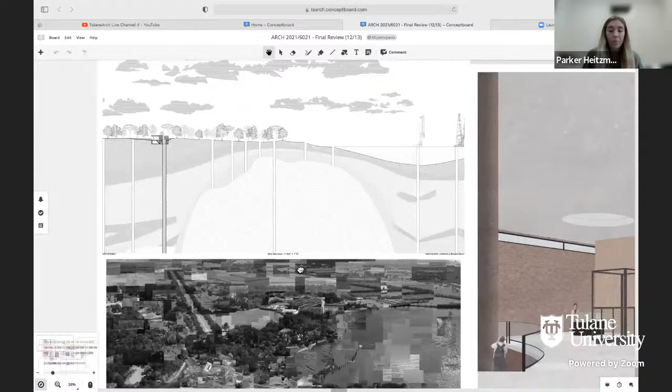Its placement was justified through its close connection to the mine facilities, the shaft itself, and the vertical extraction points along the site, which we can see in the site section below. Ultimately, locating it here highlights the existence of the process of resource extraction, which took place centered around that mine shaft.

The photo collage includes over 400 photos taken by our very own students to highlight the themes and observations made during our visit. The denser areas in the composition are parts of the site that I took specific interest in.

The model at the top illustrates the void of the shaft and how it visually and physically engages with its guests. It also depicts how the structure is partially embedded into the ground, allowing it to form a relationship with the landscape. When entering the building, as we can see in the plans, the visitor can either go to the right or left and is guided by the curved walls at the entry for intuitive wayfinding.

To the right, there is a cafe which overlooks an old train car and the lake beyond, and a small lobby with information about the site. If visitors choose to do so, they can continue outside to the gathering or sitting area and a space to interact with the mine shaft outdoors.

To the left of the entry, the visitors will be invited to the gallery spaces and the reading and archive room. The gallery space is provided with skylights and a clerestory window for illumination of the pieces in the exhibit. Additionally, there are stairs where the guests can descend down into the video exhibition or classroom that's below ground.

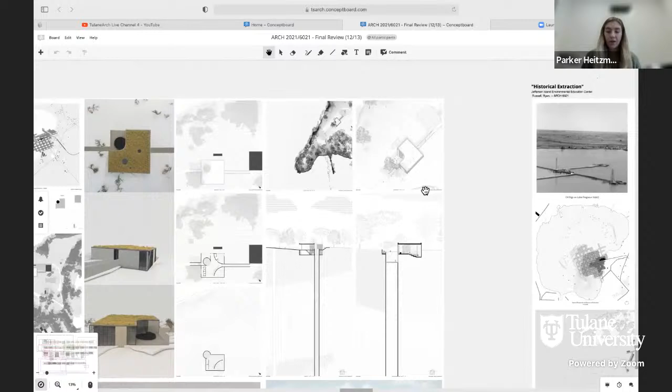The axonometrics show the proximity to the remaining structures in the lake side. And to the right of the axonometrics are the section-in-section perspectives, which emphasize the connection of the mine shaft with the building and the landscape. You can also see the cafe on the far right, which is embedded into the ground and provides an eye-level viewing opportunity for the history remaining on the other side of the glass.

The interior perspective displays the mine shaft and gallery space. The gallery space features the salt wall to serve as a backdrop for the exhibition pieces. The large glass on the right allows the visitors to again look straight down for hundreds of feet down the mine shaft. Lastly, the exterior perspectives show the overarching goal for this proposal, which is ultimately to create not only an education place of the site's industrious past, but to also connect it with the site's landscape, which is now present today. Thank you.

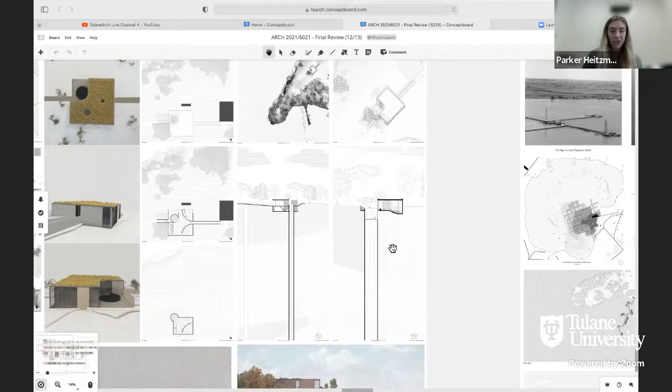First, the selection of brick was to reuse materials that are there all along the water's edge and near where the industrious site was. There's used or pre-used brick, and so I plan to reuse that as a sustainable measure. And for the mine shaft, I intended not to put lights in it because I wanted the look, where you can see down as far as possible until it's just black, to emphasize how deep into the ground it is. That was my approach for that.

And then the last question was about topography, right? The topology, and why you didn't react more to the existing site, why you just planted your very man-made rectangle square into the site and didn't deal more with the lines that the natural topography would provide. My concept revolved around the mine shaft, so I couldn't pick that up and move it somewhere else. My site is there specifically for the shaft, and I embedded it enough that you could see out into the view on one end, with the other end being almost completely in the ground, if that makes sense. So, section. Thank you very much. Okay.

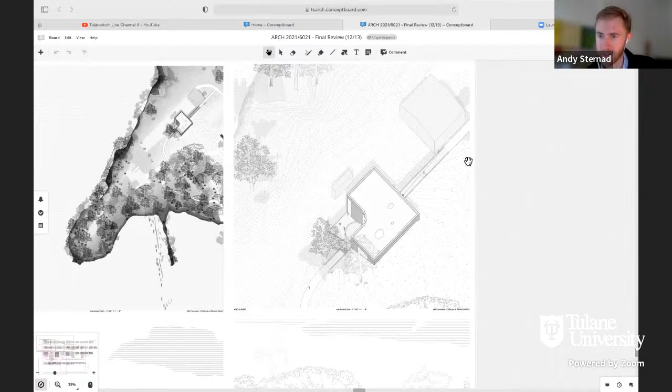I quite like the overall plan relationship to the mine shaft, the way you align in a sort of glancing way, not quite hitting it on center, but I think the question about topography is really apt. This is such a unique site in the world, especially in Louisiana, to have topography of this nature. I think there's really an opportunity with such a formally pure volume of building to either embed it more in some way that disrupts that purity, or set it apart in a way that accentuates the topography around it. In section especially, you have this sort of almost square form as well in plan and section. That might have been an opportunity, or in a next iteration, to think about how that pure square form sets itself within the landscape or apart from it.

Okay, thank you. It's sort of a Monday morning quarterbacking kind of critique, but I think there's so much possibility with a form like this in the landscape that you could have pushed it just a little bit more. But—

From my side, I see the project being really clear in its partie, as you call it, with the contrast between a pure form that is a circular inherited shaft, and then the position of the square. Perhaps what's less clear, in my view, is the other forms you're adding, the echoes of the curves, that type of movement here or here. These might be less part of the partie. So I think maybe being more radical on your first moves, the contrast between the cube, this pure formal thing, and the shaft, making that even stronger—for example, going down to the shaft with a spiral or even upwards. Expanding more the echoes of that decision, making the shaft really present, even more present, maybe in the roof or verticality, and the cube being even more radical in the way it contrasts with the wilderness of the site. Having this fight of nature, wilderness, and human presence with the two geometries, the circle and the square, even more clear. I think the project has super good bones. I would be less shy and more bold in the way you steer these two ideas, but I think it's clear.

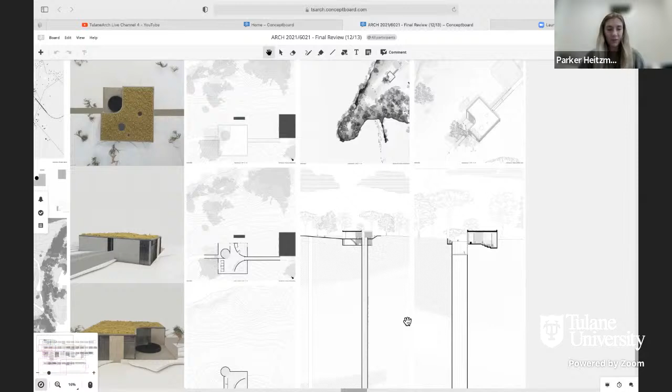So I would like to amplify something that I think Andy said, and also Marcella, this distinction between the built form and the landscape, pushing that in a bold way. I almost think folks should walk onto that roof upon entry and then move down to an almost completely submerged building through the shaft, feeling the ground fall away and occupying the depth and darkness as you move down, to really get a visceral experience of what was there and the relationship of the mine to the landscape in a dramatic way.

Okay, because I think you mentioned that in your presentation, right? The severe juxtaposition between the built and the landscape in this site. Right.

I think there are two systems right now that operate together: one is the section and one is the plan. In other words, the shaft and the path that goes through the building are really the intersection of two systems. Right now it seems both coexist, but neither is really pushing your project to the next level. What I'm missing is the experiential quality of what it's like being in your building.

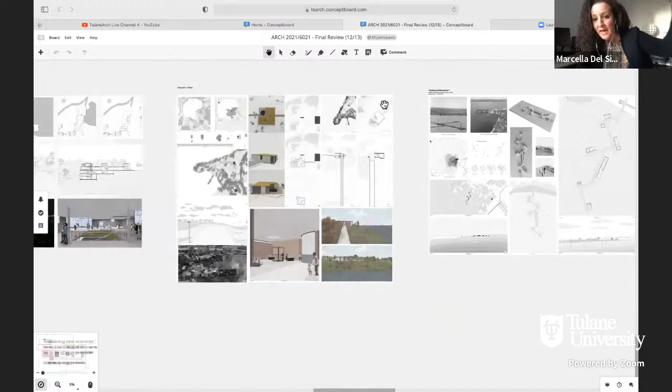So that's a question about the material, right? Why is it that way—is it mimicking what's there? Or how could the roof have provided perhaps a third, more artificial topographic level, to be able to see what's around and maybe begin to see the shaft from above? That would have been quite interesting—looking down and looking up at the same time.

But I appreciate the way in which you engage with the history of the site and with the shaft as a primary component to reorganize and redefine mostly the planar condition of the project.

I think the comment about creating this view looking up from inside the shaft to the sky is a really useful one. Maybe think about generating that view as an additional component if you feel inclined to do so, because it would really establish that relationship. That is really at the core of the major ideas here, which is centering or organizing the building around this shaft. I think it's fair to say you've gone through a variety of versions, locating the building or components of it around the shaft, and seeing what the reaction is or what the possible dialogue is. And you settled on this one, which I think is good because it offers a lot of opportunities.

But that's a general comment as part of the semester. We talked a lot about the relationship of the building to the site, what dictates the siting. How is that sectional relationship and planar relationship to the specific contextual configuration expressed, also challenged and exploited? I think by choosing the shaft as a focal point, you've done a very good job situating your building and exploring the consequences that come from that. There's always a variety of different options that could be pursued. Thinking about plan and section as areas of intersection, as two systems that can work together productively, is a good one, and I think you're incorporating that here — that's kind of the basis of the design.

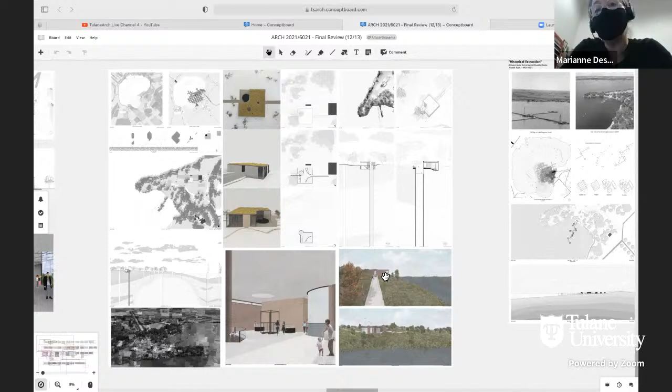If I could make one quick other comment, Parker — I really wanted to mention how productive I think the photo collage you did is, and I would love to imagine that as a strategy of representation. This idea of focus and blur in your representation of the building spaces and views from the building. That's a great point. It's an additional requirement thrown upon the section by their instructor, and I think all of them rose to that challenge. Parker did a fantastic, very laborious job putting this together and carefully selecting and collaging the images within this collage. I think this is quite a fantastic piece of art. I would actually print this out and hang it on my wall if I were you, or sell it as posters.

I could only imagine this as a conceptual underpinning for your future work. I'd really like to see what might come from this kind of strategy. There's something about dislocation of view within it too that relates to the shaft in a potentially productive way. But it was strange to see it on screen at first, sort of pixelated — I thought my screen hadn't caught up to the image. Consequence of virtual review.

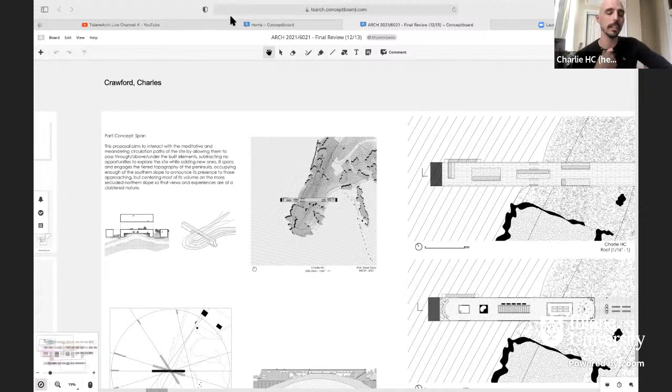When I was given a tour of the site and surveyed it for myself, one characteristic that was most endearing was the long and meandering paths and opportunities for exploration. I was reminded of Corbusier's Ronchamp and how celebrated that progression is. So while developing ideas and prototypes for the site, I sought to add circulation opportunities, not subtract from them. The peninsula became the focus of the proposal for two reasons. Firstly, it is the most remote part of the site, so progressing towards it presents the history of the site visually — the lake itself, the mine shaft, the piers, and the rail infrastructure — before the program of the proposal itself has the opportunity to present these.

Secondly, the peninsula has a unique terraced and stepped topography. Finding a way to engage this terracing became a North Star throughout the proposal's iterations. If you look at the top left image, it took many different shapes. Originally the far ends of it existed on land, but I was further challenged to extend those ends into the water.

The proposal was placed specifically on the peninsula nearest to the narrower end of it, to more easily span it, but also with the idea of preserving the experience of reaching the end of the peninsula without any intervention.

Initially, the orientation of the proposal was set parallel to the direction of the rain runoff and perpendicular to the peninsula itself. This was changed after consideration of the damage that human occupation has made upon the site, so a gesture contrarian to the landscape was deemed inappropriate.

In its current iteration, various existing grids and angles were considered, and the proposal is oriented to not create any right angles. So in a way, it subtly acknowledges both intentional and unintentional elements of the site.

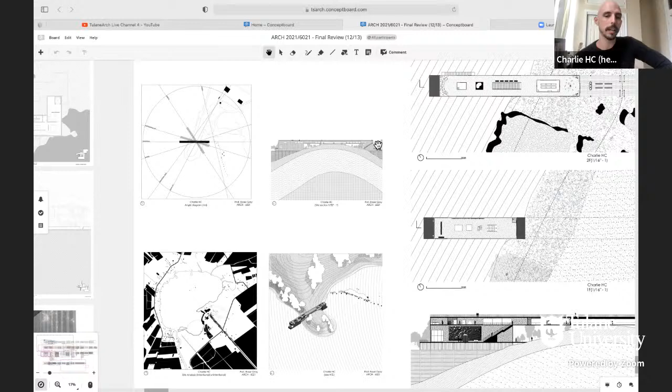One may pass through, under, and over the proposal. Although fairly large, the dry surface area that the proposal actually occupies is rather low, only making contact, as you can see in the elevation or site section, upon the very topmost part of the terracing element on the peninsula.

Most of the volume and program are concentrated on the northern slope, to minimize distractions for the occupants of the exhibits to the north. On the south, the cafe announces its presence and invites those approaching from across the bay.

If we look at the plans, we can see that you enter through the ground floor to the second floor, through the center, where the opportunity exists to go through the proposal, and you may turn to the right or to the left.

On the right, as mentioned, the north slope houses most of the exhibit program along with some back-of-house elements, while the southern slope houses mostly back-of-house with the cafe element.

The roof of the proposal provides public space, along with the interior central part on the ground floor. These public spaces offer opportunities for socialization and outdoor classes.

And that is my proposal, the proposal.

You want to talk a little bit about the section again and your views?

So in the views, I tried to capture the amount of people that the proposal can house as the design process went along. More and more length was added to it, so part of the narrative I'd been creating was that it was capable of housing a lot of people. I tried to incorporate and communicate that through my views, just the sheer magnitude of people that could experience the proposal.

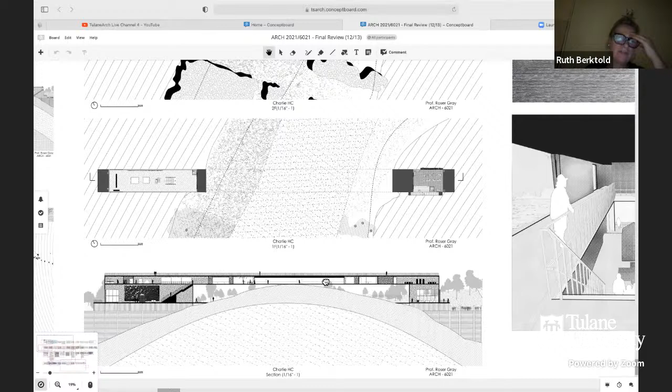Is your building on pontoons? I mean, when I looked at the graphic where you show your bar moving, I was all excited because I thought you were just going to use the island as a pivot point, and the building would flip around. Now I have the feeling that you sort of grounded it after all, because I see some posts going down.

So yes, the building does not rotate. It conceptually rotated, but it does not rotate in practice. It is anchored on pilotis that extend underneath the surface of the water at certain points near the middle.

So what happens in the lower parts where you have very high ceiling heights versus the upper, let's say, bridge with the lower ceiling heights? Why that distinction? Is one an exhibition space and the other a visitor center, or?

The height of the ceiling does not determine function. It's more about the slope, so the north slope houses more of the exhibit space with some back-of-house elements, while the rear houses the back-of-house elements with the cafe.

The difference in height has more to do with engaging the level of the terrace it's interacting with. So in order to support the top level but engage the lower slope, that room's space from floor to ceiling had to be a little higher.

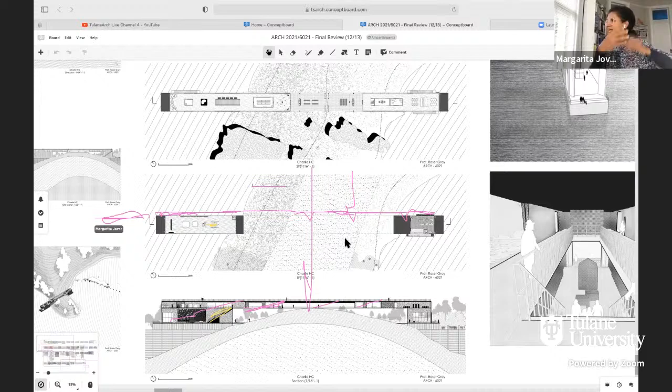So you have this movement in this direction and also in this direction—you go and then take the ramping, and maybe that can even extend into the water as a pier, making it super long. I understand.

I want to ask again, at the beginning, because I'm interested in the infrastructural aspect of your project. Your project does a lot of things at the same time—it's a bridge, a long bridge with a long span, and we can talk more about that. But at the same time, I think it creates multiple opportunities to experience the landscape, and provides a more direct connection between the left and the right.

In the diagram you have with the rotation, there are two directionalities happening at the same time. One is going through the bridge, and the bridge is really going towards the water—it's a sort of entry point to view the landscape. So it's also a viewing device, even though it's pretty large, thinking about inhabiting the landscape from afar, not really close. But also it starts to provide this new directionality into the site that's not there right now, connecting the left and the right.

So I think it starts to play a very delicate balance between man-made and nature, where nature, in your project, starts to be reconstructed through the different points of view and the different moments in which you experience the landscape—from above the bridge, on top of the bridge, inside the bridge itself as infrastructure. So I appreciate that about your project.

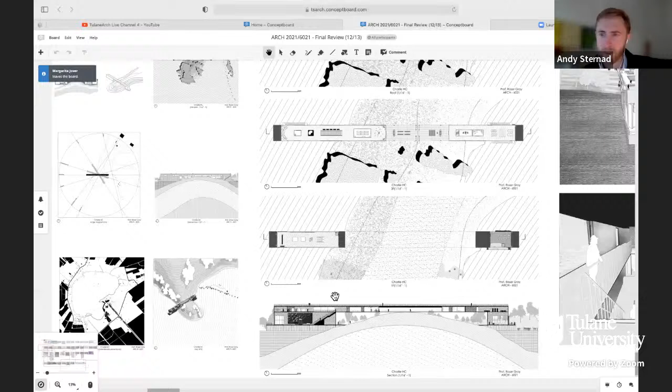I think there's a conceptual question which I still can't quite figure out where you stand, and the Superstudio reference throws me off a little, because that was meant to be a totalizing form, something so completely dominant. I don't think that's what you're doing, and I don't think that's what you're intending. I think you're doing something a bit more nuanced, maybe reacting or playing against that idea. But I can't tell if this wants to be three times bigger or three times smaller. I can't tell if it's the right size. I think that's part of the underlying question—your perspective on the landscape.

It may help if there were some indication of the building's peripheral impact on site—its access points, pathways, sense of arrival, where you're coming from and what you're seeing—whether you're trying to set up the building as a frame to look through, or something meant to deny, or give you a sense of payoff once you finally make your way through the threshold to the end of that little appendix of a peninsula. So a landscape approach would help clarify what the building is meant to do.

I also saw at first your section where you're just barely touching the top of the hillside—that really makes me uncomfortable and kind of angry. It's so close to touching. Do you want it to touch, or do you want it not to touch? Well, don't answer that. But thinking about it more, there's some productive tension in there that you might play on, and I don't know—there's just something about that one moment I can't figure out, and I want to know more. But maybe that's the point.

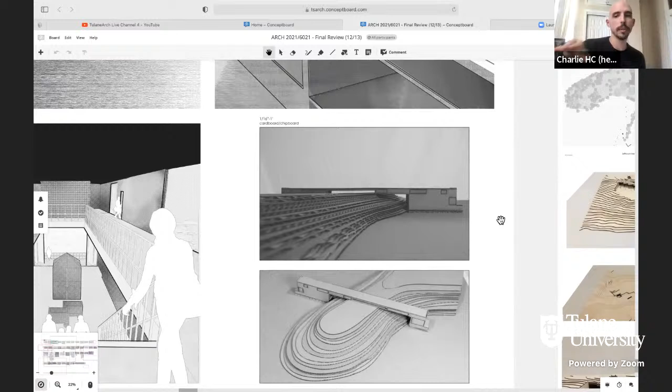That's a detail that's been changed constantly throughout the lifespan of this proposal. Why did you end up with this solution? So essentially at first, my first intuition was to set it at ground level. But then that sort of implied a moving under and not through, whereas elevating it just the slightest bit created the experience of moving through versus moving under.

Okay. I wholeheartedly agree on the several comments in regards to the scale of the building. It's a little bit unclear where it wants to position itself. And looking at your presentation today, Charlie, I almost think it should be much bigger than it is. I know that poses some concerns in regards to square footage, but maybe not everything has to be filled with program. I feel like it's already on its way to this specific kind of statement it's making, but it's not quite there yet. It's a little timid, and I think exploring variation in scale might be interesting just to see what it generates, because you didn't really do that yet to a full extent.

It has been hovering around the size, right? Most of the extent, just to maintain square footage, I've been extending it and shrinking it through the middle. So that was a way of playing with the scale, but not really affecting the program.

Maybe there are other architectural maneuvers, a screen or a canopy, that could double the perceived scale of the thing if that's the conceptual intent, without affecting the program. Or the suggestion, really conceptually, and I think that's where you actually came from, to consider the building as a gridded system almost, not literally as a scaffolding, but a scaffolding of sorts that allows for program to be placed more loosely, but then to extend the footprint or the envelope of the building without getting in conflict there.

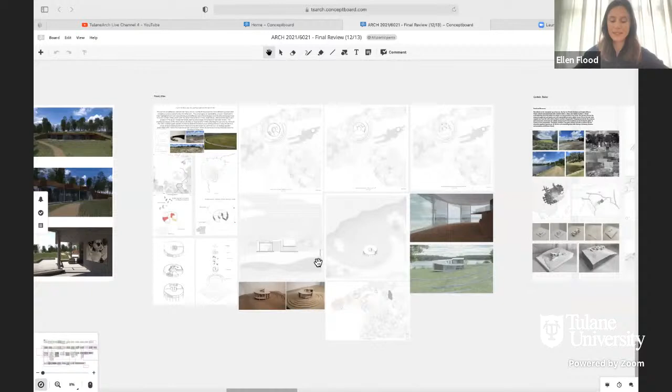The entire structure sits on a piece of terrain that descends about 12 feet, allowing it to sit gently on pillars and to appear as though it's almost gently floating on the terrain.

That is my presentation. That's it.

Okay, then I'm going to storm in again. You're putting your building sort of on a pedestal. I mean, that's how it looks in the model on the right-hand side. On the left-hand side, it looks like...

That's the other side, I guess. On the left-hand side, it looks like that whole kind of curly snail shape is going rather down. So you show it as sort of a round building, but then in the drawings it's hexagonal, or octagonal, whatever you'd call it.

You should probably talk a little bit more about what the shape is, what the landscape does, how important the view toward the water is, and where exactly your shaft is.

So this is not actually the mine shaft. If you look at the diagram, you can see that the windows overlook the sinkhole, which is in the lake, as well as the mine shaft. So it's not sitting on the shaft.

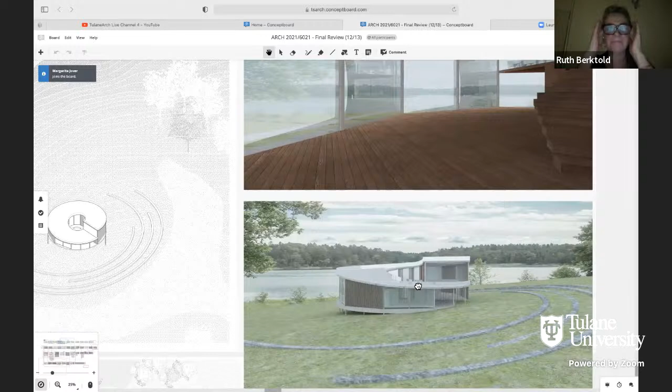Okay, and can you say something about the landscaping or the topography? I mean, it sits in section totally flat, and yet you've built this whole amphitheater around it. Also your three-dimensional shape is spiraling higher up and is not overlooking the water, but overlooking the other side. So there must be a reason for that.

You have an amphitheater facing the water, but the top of your building is actually looking towards the amphitheater. And...

So that's a bit confusing. I see the confusion there. That's not entirely an amphitheater, those are sort of stones set in the path. So it's just to set this exhibit aside, because the site is jarring in that sense.

Where this exists, on one side is an old salt mine, so it's very disturbed. The soil is not soil, it's just dirt. And then on the other side is this beautiful lake. So the reason I chose to do a circle was to allow the visitor to see the whole range, the spectrum essentially of human intervention on this space.

So it's not — you exit the cafe and you can walk all the way to the top. That entire rooftop would be a rooftop garden. So it's not overlooking the amphitheater, but I see how, in the renderings, it looks a little bit like that.

And did you ever think about meandering toward the earth, into the earth in section? It looks like it's sitting there plain flat. And again, where is your shaft?

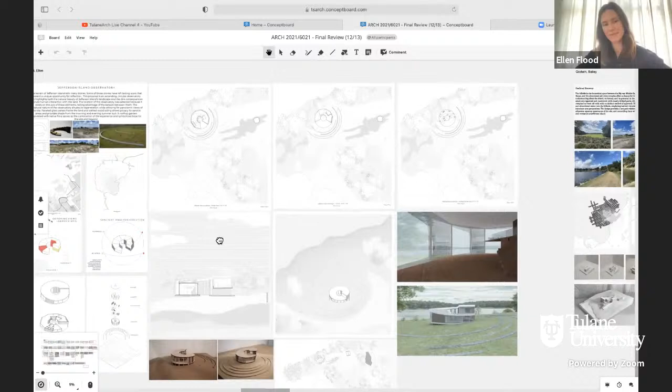Did you never think about going into the earth? Because you made this nice sculpture and then you sit so flat on the ground.

I intentionally had it slightly elevated, and it's only slightly elevated. The incline is about a 12-foot incline from the first stone that is laid to the back of the building. So it's a very slight incline, which enables you to see the entire site from the building. I liked that it was sitting gently on the land. I thought that was a good representation of the intention of the building, which is to be gentle to this land that has been sort of abused in its recent history.

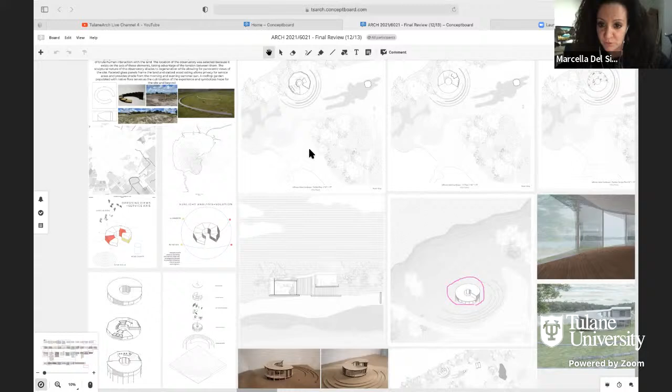Understood, thank you. I think this has to do with scale, as we talked about in the previous project, but also in a different way here. I agree that some elements are maybe too small—the void in the center, or even the way the cafe extends out. Right now it seems quite different from your intentions, because you start really looking at the building as a viewing device into the landscape that is actually segmented into, how many, 1, 2, 3, 4, 5, 7 or 8 moments, right? So that's the question—whether it's a circle or is segmented into these parts.

This diagram that you have at the beginning is key to understanding how the project might evolve, because I think your project operates on 2 or 3 levels. On the one hand, it's a pretty internalized condition, meaning that from inside you enter, experience, and see these key moments within the landscape—the shaft and the sinkhole. I think there's a relationship between how far these objects are and how you begin to calibrate the scale of the building as well.

There are two things: I think these selected moments inside the building itself—what do I see, where I am, and what is the relationship between the landscape and this object within the landscape? And the second has to do with movement, because your project really talks about the spiral movement up and down. I'm glad you talked about the roof, that you can actually walk on it and reach the top.

But the same spiral movement also happens inside the building, even though it's flat. So maybe I think it's a possibility for you to begin to see how these two relationships work in section. Perhaps the floor, right now everything coexists in terms of program. So I enter, and I exit exactly at the same point.

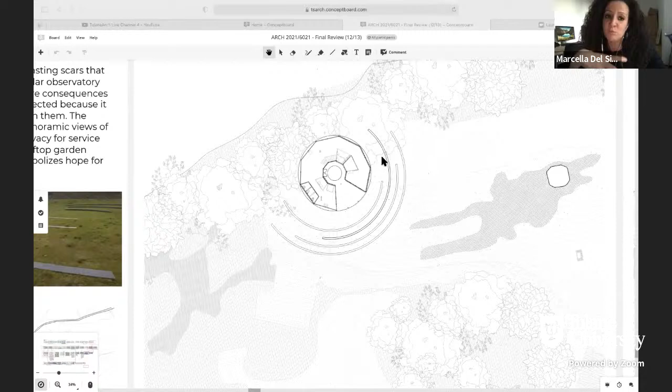But what if I start to change the entry and the starting point and the end point at the plan level, because you only have one floor right now, and then automatically they start to shift some of the moments also in the roof. And because it seems to me the experience from inside is quite the same, even though you're trying to break down this view into multiple parts.

But when I enter, because of the scale of the building, that it's small, I see everything at the same time. So the question to you, how you define the procession in order to perhaps at some point see everything at the same time, but also do the opposite, be able to only see certain things in a very selective spatial condition, which right now is not happening.

So it's pretty much the same, right? I enter, I see everything, I exit, and then maybe I can go up to the roof and it's exactly the same thing because I see everything 360. So there is not really differentiation between, let's say, an individualized condition of viewing the site versus the collective.

And so this, I think, could really benefit your project in terms of establishing some sectional relationship between the way in which you move around into these nine segments, but perhaps from inside also you connect to the roof as well. And I think it really has to do with the spiral movement.

So maybe as you go up, you start to go down at the same point. It starts not necessarily at complexity, but really the double loop from going up to down and down, from ground to the top and then from the top down.

And that, to me, that's really the key, because you're trying to define moments of compression and expansion, because if you look at your model, it's not the same sectionally, but the change, the variation is very small. So I'm questioning how this variation really operates within the larger landscape, which is vast in relation to the sculpture piece that you're trying to develop.

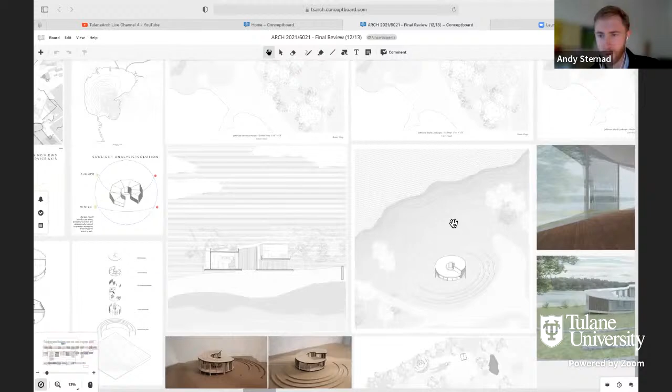But I think there's a question about the program inside as well, and the way that you sequence, sort of like what Marcella was just saying, sequencing different ways to circulate inside, or Professor Jover's comment about adding walls, something to preference those frames that you describe and the view, and maybe choose where you're supposed to experience the continuity and the frame, because I think they're fundamentally quite different. It's moments within a system, and I think you need to set up both the moment and the system.

Okay, thank you all. That was very helpful. Great feedback, thank you.

Just a last comment in that sense, that the bathrooms will be in another position, no? Because they either belong to the radial and are inside a wall, but they will never be in the frame, no? Like in the place of a window. So I think it's important, when you have this scheme or partie, to decide where are the opaque things and where are the open things, spaces.

Now, for example, this box here, the bathroom here, maybe either on the center if it's opaque, or in the radial condition that is also opaque, but never in this kind of window.

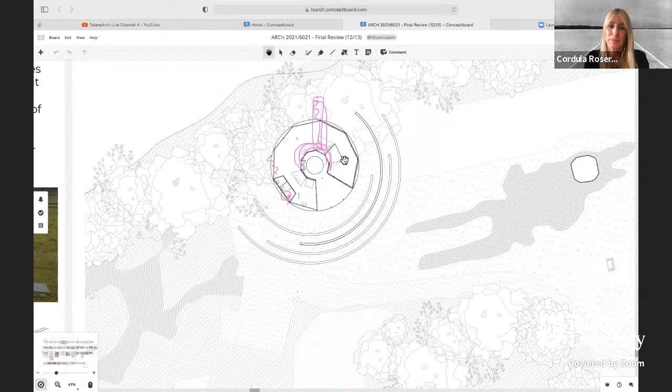And secondly, I do think the comments regarding the tightness of it are spot on. With all the site and context available at your disposal, it's very sculptural and compressed at this point, and allowing it to breathe and open up, also in regards to the courtyard, in regards to approach and sequencing through, I think is a useful comment to think about if you wanted to push this design further, or keep on thinking about it.

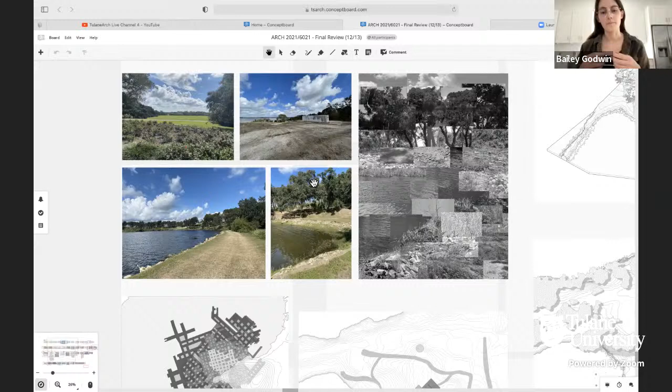So I thought by placing my proposal in the site, in the hillside—excuse me—if we look at my diagrammatic site plan below, I can pull together the two different experiences and really mix the innocence of the procession by the water's edge with the curiosity and even confusion from coming from the edge of the salt mine complex. So by organizing program into the most associated realms of leisure and more serious exhibition space, and mixing them together, I could create a cohesive proposal that allows people to discover the most they can about the site through exhibition space, archive artifacts, and different views and perspectives.

By embedding the project at the point where the topography slopes such that it reaches a peak right at the edge of the abandoned salt mine complex, we place an entrance at that point.

And by placing an entrance at a gentle walk up the lakeside level, getting those two people in at these different levels will keep their narratives consistent, but there'll be vertical circulation columns that allow them to mix.

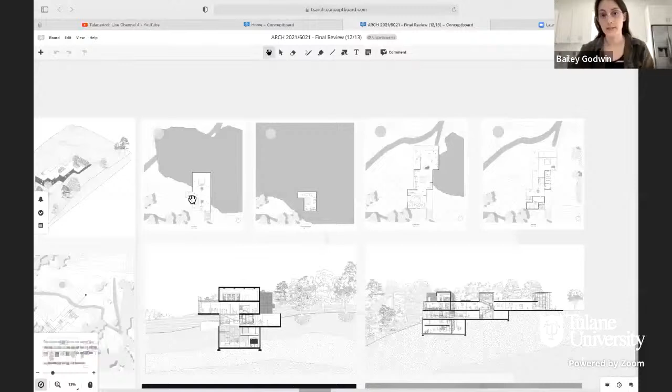So by coming in this entrance at the stairs, this floor plan is left entirely open without any definitive programmatic elements, because in order to really explore the site, you have to commit.

You have to commit to exploring this building. And when you do, then the whole history, the culture, and its future potential really opens up.

So from these two points of vertical circulation, organized on this 3x3 grid, we can go underground to explore the salt mine exhibits on the level below, which features the salt mine cart.

The hoist cage is in a lowered, compressed ceiling environment, and then it opens up expansively into the salt wall, which concludes the procession of the salt mine exhibit portion of the proposal.

But if you choose to move upwards, you could go to the cafe level. There's an Audubon exhibit with a more generic, open floor plan, kind of lobby space where you could freely explore.

And you have these different views at the top of the stairs, which show you selected perspectives and portions of the site.

You never get the whole picture until you ascend to the third level, which has this open roof plan. And then you can explore the disaster archive and the video room and see any perspective of the site that you so choose.

So going from the most closed-off portion of the proposal in terms of view to the most expansive, that's how you get the most out of the site.

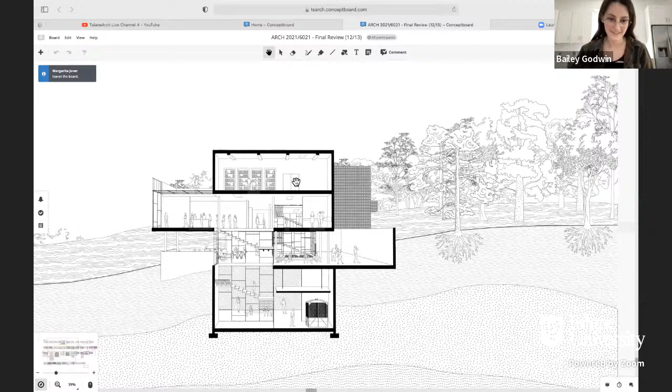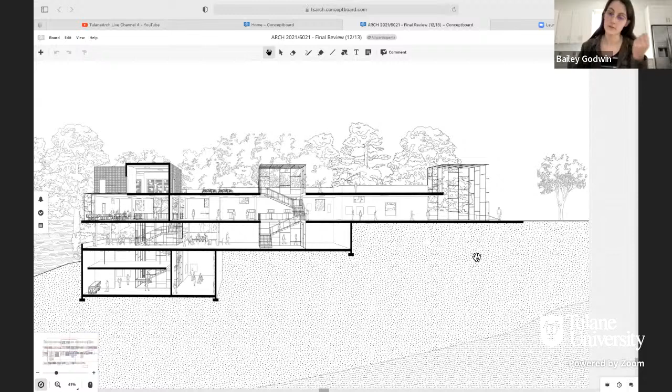When I first conceived of this proposal, I had thought of a 3x3 grid that I then extended four levels down below. By playing with subtractive processes, I came to these interesting extrusions of vertical and horizontal circulation. By placing the pieces of program here, the design pulls you through the horizontal planes to help you access these different parts of program, but only so much as the visitor chooses to commit to doing so. That's the meandering I really wanted to emphasize, which is why the floor plan is entirely open on the first floor level.

So if the visitor wishes to do so, they can learn more, they can glean a better understanding, they can attain a deeper perspective and enlightenment about the site and its history, because it is very rich. I don't know if that answers your question.

It does. It's confusing because you sort of lose complexity from this first model where you have all these different elements. Then you show the rendering with the cutouts, these small cutouts, and it looks really nice in the night view. But somehow I have the feeling that because you're putting this cantilever out there, there should be a more defined path, or the path should be more architecturally defined to stand out. But that's just me, I'm sure there's plenty of other opinions.

Thank you. Thank you. Excellent.

In my view, this is a really precise and intentional proposal where the content of the exposition and the form of the building are really tied together. They are really coherent and cohesive, I think. And you can tell that you have architectural thinking.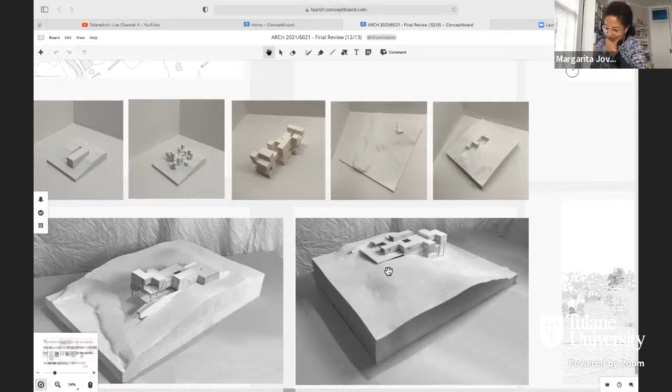If I can see this section perspective, to respond somehow to the question posed by Ruth, I think there is something about the way these volumes sitting in the floor plan articulate the movement from one level to another, this kind of vertical per se. I think they are strong, but maybe they can be even stronger in the way they guide the movement from one place to another, because you have a sectional possibility.

When you're here, you see that one. I think maybe if the building is able to allow views in section, or more intentional views in section between one vertical thing and the other, not only in plan, that perhaps will strengthen the guidance of people from one level to another. So it's not only vertical and sectional, but diagonal as well, so that if you're standing in one place, you can view the other. Are you guiding this or not? How can you make it? The transition between plan and section, I think, will be a way of strengthening.

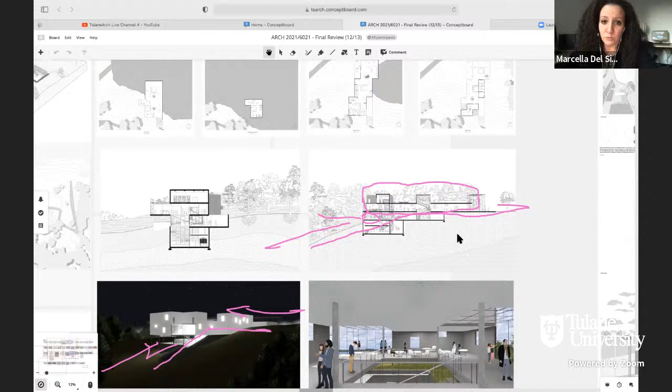I'm wondering if there are moments to blur the boundaries between the interior program and the landscape. Maybe the building starts to expand this invisible grid into the landscape. This could be a way to look at the building differently, sectioning it this way too. I'm wondering if there's some extension from inside to outside, the same logic of the surface going beyond the existing envelope. I think it works as a building, but my question is how it can operate even more as a device to engage the landscape.

Right now the envelope is sort of set—even at night it glows, and we can see it as an object—but I'm talking about the negotiation between nature and the man-made. Right now the edge is quite strong. Besides the views outside and the content of your project, the exhibition itself, perhaps we could blur the boundaries a bit more between the landscape and the project, maybe with some semi-open spaces that start to enter the building in some ways, because it's very contained right now.

That's a good point. I think you've done a great job in plan transforming the simplicity of those three boxes in your program diagram into this kind of Tetris box. You can still read those three boxes in plan—I guess at the hilltop level—but above and below it breaks down in a nice way, and I think it starts to suggest that diagonal that Professor Jovanovic was talking about.

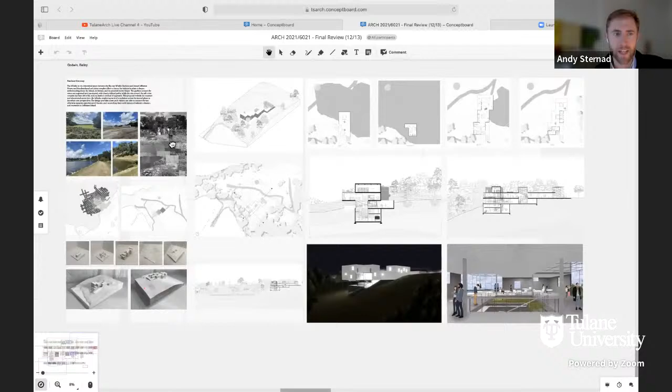I think there's a really clear sky, canopy, trunk, and then like two-thirds of the drawing is earth and water. Maybe that's something you could also explore. There's a sense in your building spatially of being in the canopy, and the hilltop level is like the piano nobile, the primary floor. What does it mean experientially to move down below the canopy, or above it, or into the earth? You're starting to do that, but it's really clear in that photo collage, and maybe something to pick up on in your renderings or perspectives, that sense of being in the canopy or above and below.

Bailey, I really love that you included these progress models. They explain the progression toward the resolution of the project really well. There's a lot to be said about that center study model, which we already picked up on at the midterm review. Looking at your final model, I believe you managed to maintain most of the complexity, though the center study model is still really fascinating to me. It kind of morphed into a project on its own from there, and while certain things were simplified, I think other things were gained. Overall, this is a really convincing presentation. Good job.

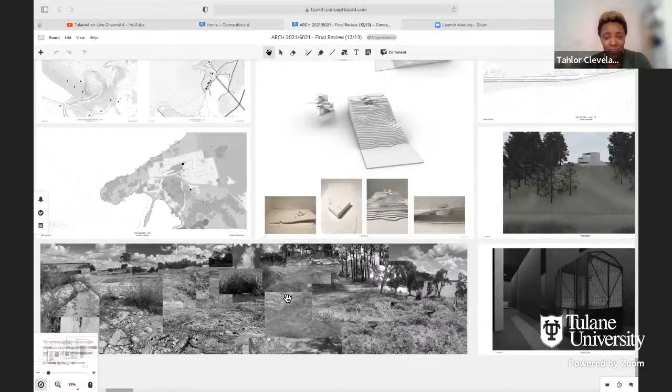And then down in my collage at the bottom, I took that a step further, looking at what's on the site - very much this feeling of...

...history of things that were there and are there, but you get a vague sense of not knowing what those things are when you're there. That was the main basis of this proposal. So looking at the very top, the site photos were a big part of that.

Here you see a remnant building of the mine operations, the piers peeking out of the water, as well as that chimney that Carrie also showed us earlier.

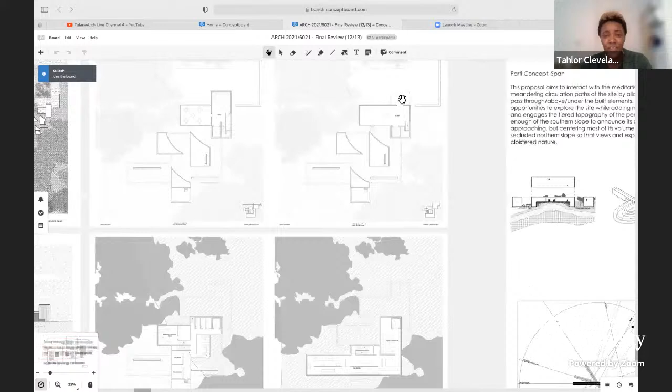Then on the ground level is, again, that lobby space with the channel glass walls that allow you to look to the lake and the pier remnants to the west and to the lakeside, and also seeing the former site of the mining operations to the north. From there, you can either take the elevator down to various levels or take the stairs down.

Into what I am calling the third level, but actually here on the left side are levels 3, 4, and 5, where various areas have been offset at different heights to again give you the sense of descending further and further into the ground.

And this is where my auxiliary spaces, reading rooms are. And then at the very lowest level are the gallery spaces. These are the spaces that call back to those mining areas and those large cavernous spaces, where it is a very long linear space with very high walls that holds all of the exhibition areas.

And then moving over to the exterior perspective, you can see in this view from the water how those different spaces and various levels of programming are coming out of the ground at different spots. And as my colleagues have mentioned, those approaches from the waterfront and from the hillside, it's meant to kind of grab you and intrigue visitors and want them to venture up to what was the more barren area of the site, and to intrigue them with what's going on further below what the naked eye can see.

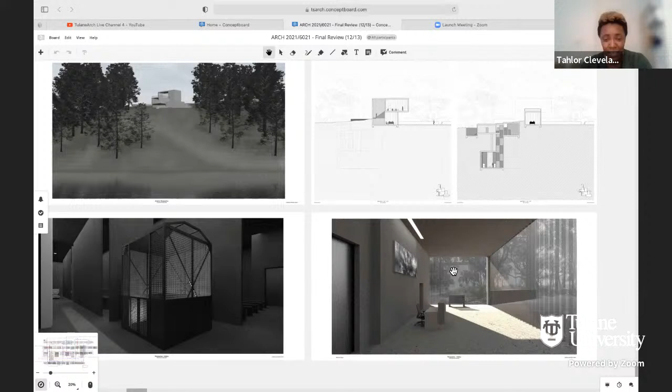And in these interior perspectives, you are seeing again that play on light, where this lobby area is mostly glass and you can get those views out to the water and out to other sites of the island, versus the much darker gallery space with its much higher walls and exhibition spaces.

So that is my proposal. Look forward to your comments.

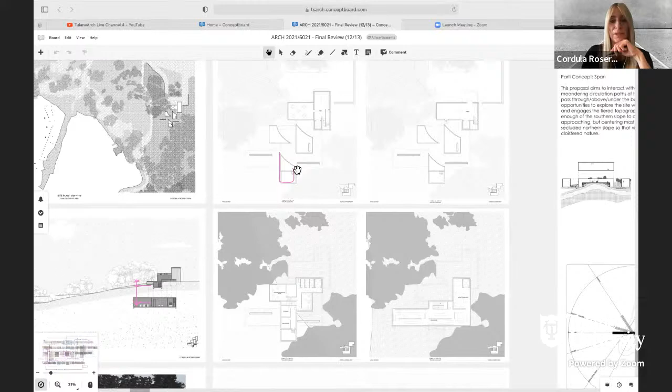They're within the ground. And what do you see here on the ground floor, on the cafe, let's say on the cafe level? The imprints that you see, are those the true roofs of the building? That's the roofs of the building. Yes. Sorry. Okay.

I think this is a very important question, because to me your project is about this delicate tension between the exposed surface and the programs that start to emerge from the ground. So in other words, I think there are two things here. One is the strata that really operate as these sets of programs stacked on top of each other, some below ground, some above ground. So on the one hand, I think you have the narrative of the strata that are able to look at the kind of geological history of the site, and connect back to the history, metaphorically or not.

And so I think there is an engagement of the narrative in the way in which the project operates. Then the second level is the relationship between what's above and what's below, but also the registration of what's below onto the surface of the landscape. I'm thinking of the early Emilio Ambasz projects from the 70s or 80s, where basically 90% of the program, even for public buildings, is underground, but what emerges above ground is a trace or reference point within the landscape to help the public orient within the landscape to see what's above, and, as you said, trigger the curiosity of actually moving from what's above to what's below.

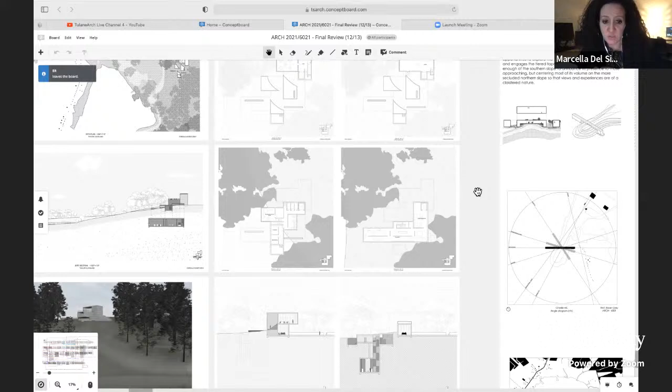I have specific questions about what happens in the lowest point of your building here. Let me annotate right here. So I guess this is completely dark, right? Not completely dark - there are two skylights as well as interior lights inside.

So I think the light is really the third component. On the one hand it's the strata, again repeating myself, and the second is the emergence of some of the objects above ground. The third is how the lights start to operate in section.

I think some of these spaces could be - do you have a view from this gallery? Yes. And it seems that there is right here. Okay, great, so we see it's quite light there.

I think it's quite an elegant project, and there is a lot of potential, and now it really is weaving together a lot of things, both from the program distribution to the metaphor to the way the landscape starts to be engaged. Thank you.

I just got those scalloped shapes - I get it now. I think there's something so elegant in the way those forms interact with the orthogonal geometry. And I think you've already started to extend that into the landscape, the way you approach the building from the hilltop. You have a couple of site walls with a little bit of almost Corbusian geometry.

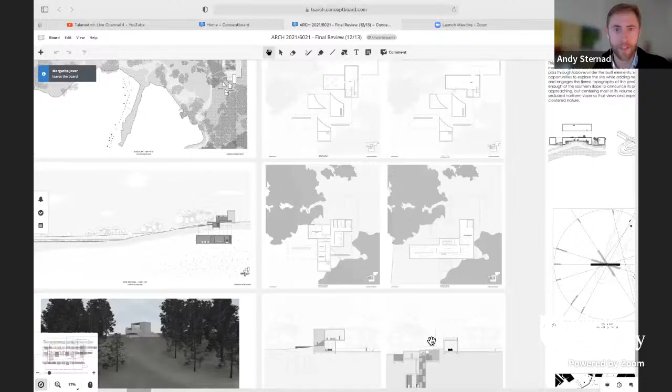But I wonder how you make use of the dirt in between, because most likely they wouldn't fill the dirt back in over the thing they built, so it's going to be constructed in a big hole. And so I don't reuse a lot of it.

Sorry to interrupt you - I don't reuse a lot of it, but I do reuse some of it to help in getting those middle layers covered and to build up that elevation a little more to the south side of the building. So that was my thought, but I know I'm definitely not—

There's still a lot left over, but I mean more like the intermediate level right above the gallery roof. Okay, so is there a way that you could use that space in a productive way, since you're going to be excavating anyway, without compromising the feeling of the diagram and the experience? So it's sort of a graphic challenge, but an experiential challenge too.

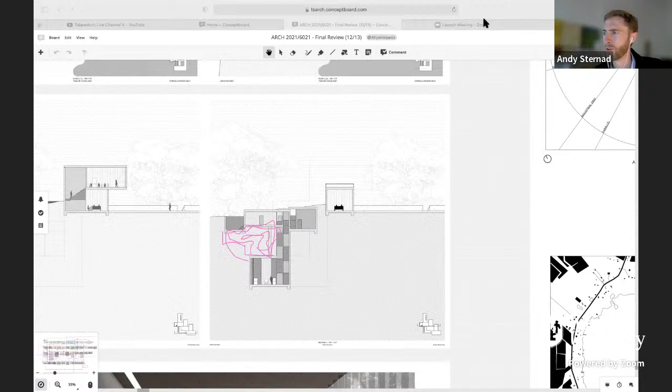Okay, I kind of see an echo of your project in one of the very first drawings about the topography, the changing topography, contours, and waterways, where you have the sinkhole topography overlaid with the former shoreline, and there's a way that the geometry of those contours are interacting and crossing.

I see an echo in this scallop versus orthogonal quality of your project. It makes me think that maybe your project is so much about datums and what's occurring above and below, that I wonder if there's a way you can give more meaning to the depth.

For example, could one of the floor levels of the gallery occur at the same elevation as the lake, or at the same elevation as the sinkhole? So you might layer additional meaning onto this project that you're excavating anyway, and maybe it goes to the height of the roof of the cafe, to something above the height of the oil derrick, but you've got all of these datums

that may, I don't know how you might experience that besides just knowing in your head, but it seems productive somehow. I think this is a really strong interrogation of the vertical.

I think that's a great suggestion. I've talked about this with others on their projects, but specifically here, I think this is a very useful suggestion, at least to build that into your construct or your concept of your sectional organization. What are the relational lines that emerge from the context that are translated into an understanding of the height relationships within the building?

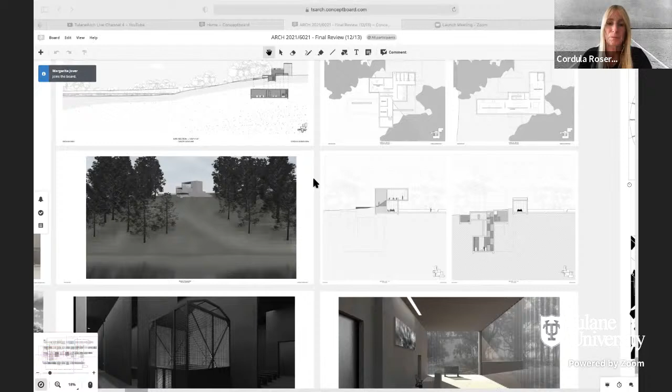So I think that's a really good suggestion. And I think these little diagrams, these little 3D model illustrations, are also really helpful to understand the complexity of the building underground, but also how it inserts itself into the landscape.

Okay, great. Any other comments for Taylor? And I agree on that space in between, I think we talked about that a few times already. Just because you're digging in doesn't mean you're not excavating a large portion of the site, and since you're refilling, what can happen or what can become of that space in between? So make that experiential or occupiable, I think, is a really interesting suggestion.

Thank y'all. Yeah, datum and strata are two really powerful words. Very good. You could explore that further and see what that means, or how that could be applied more directly here.

Just one other thing, I appreciate how you've sited the building just below the hilltop. I think it's a clear intention that you don't mean to engage the top, and you don't mean to engage the water, but you're really rooted in that spot. I don't know, somehow it feels right.

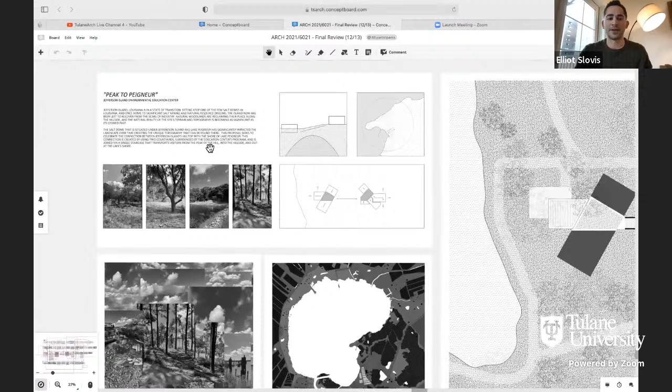The site chosen works to engage with both the steepness of the topography as well as two major ecological points of interest on the site, the hilltop and the lakeside. The peak of Jefferson Island and the shores of Lake Peigneur act as anchor points for this project, and the placement of the structure at one of the steeper areas on the island allows this project to communicate with the topography in multiple ways.

This proposal of an educational center and Jefferson Island Historical Museum seeks to connect these two anchor points on the site by creating two masses that are connected via an open air staircase that will bring visitors from atop the hill into the hillside and out onto the lake's shore.

The experience of this space is highlighted by two courtyards that are surrounded by the program of the education center. As visitors enter the space at the top of the hill, they first encounter the more specific and introductory areas of the lobby, the reading room, and the video exhibition area.

The lobby allows for a northwest view out over the hillside, and then it leads visitors into the first courtyard, which is flanked by the video exhibition space and the archive reading room.

This more formally structured sequence then circulates visitors down the open stair corridor and embeds them into the landscape where the program loosens. The gallery space is split by the second courtyard and anchored by the cafe, and visitors are encouraged to freely circulate through these more open elements.

Finally, the cafe and associated porch and outdoor classroom provide sweeping views of Lake Peigneur and Jefferson Island, as visitors now find themselves at the bottom of the hill out on the lakefront.

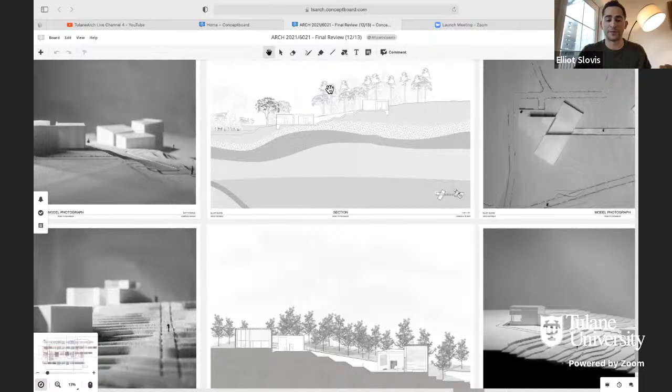As the program relates to the landscape, the relationship between the building and the ground can be seen in the section and section perspective drawings. This relationship emphasizes the steepness of the terrain and the implication of the impact that the topography has on the building.

And finally, the renderings and more atmospheric model photographs at the end work to express the materiality of the project as well as the spatial experience one has at different moments while inside the space, as well as from the site that the structure is situated upon.

The decision to set the project back from the lake allows visitors to take in views of the lake, the hillside, and the education center simultaneously.

Overall, this project works to not only respect the landscape which it sits upon, but also create a relationship between the built environment and the natural beauty that is now found on Jefferson Island. So thank you, and I'm happy to field all questions, critiques, comments, anything you might have for me.

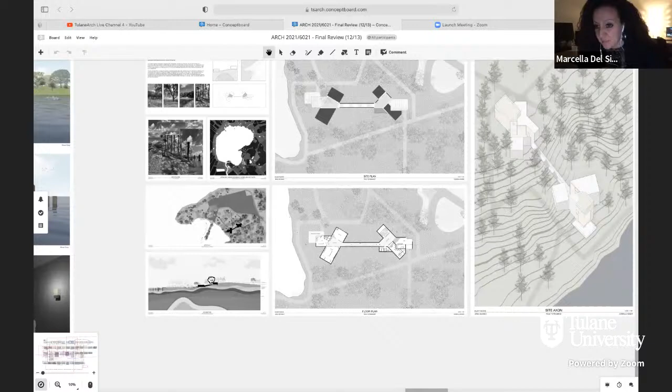So to me, the building almost works without a particular directionality, even though you move from the top to the bottom and you look at the water. But at the same time, because of the way the two anchors work and the connection works, the experiential condition is really triggered by moving back and forth from the site to the water and from the water to the site.

So both of them are, to me, points of departure and arrival. And I think this can be appreciated clearly in the views that you have at the bottom where you actually see the interstitial space in between, and from the rendering at top it starts to talk about this exchange between the views from the water up to the site.

And also the fact that as you move up from the water, you are embedded within the site and you see the upper part of the program. But also appreciate that when you move down the anchor, you have an overlap of views, the water behind, but also you start to see the water through these openings that connect back to the path. So I think at the experiential level it's quite strong.

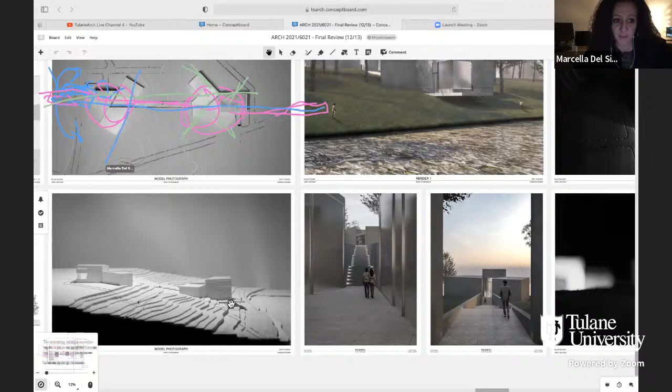And then I think there is the second layer in your project, which is not only the directionality that we see here, but also the split of some of the views that start to generate another way of navigating through the site. So on one hand, we move from top to bottom in this direction, but also these parts of the building, these programs, are oriented in a different way, and you start to define frame views into particular sections within the site.

So I think these two are calibrated quite well within the project: the more selected views and the more linear condition of movement, top to bottom and vice versa. Then the last part to me is this—if you move a little bit more up here, it's the way in which these masses start to open up to the corner.

So in some cases there is a quite clear relationship between what is solid in terms of facade and when the corners start to open up and look at the view. So almost I want to see maybe a little bit more, to continue to further curate these curated openings within the diagonal condition. I'm talking about this, right, this diagonal condition versus the linear condition of your project.

Sure, yeah, I understand. Thank you.

I think a couple of things. I think you've got the scale about right — the upper and lower ends of the barbells seem like the right size in the landscape, so I appreciate that. But I think your project really hinges on the path, as you described.

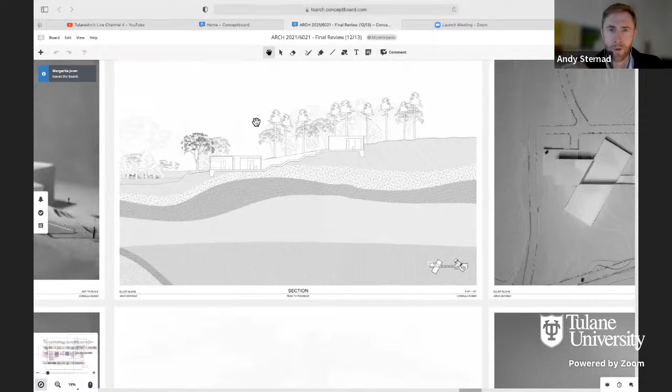More specifically, the relationship of your eye and your body above and below the ground surface. In your long section cutting through the path, it almost feels to me like it's too much about code and how many landings you need in a staircase. I think that got in the way of the experiential nature of what that path could be. It seems like you could choreograph that experience a little better.

If you manipulated the rise and run of the stairs, for example, maybe don't think of it like a staircase. And building on some of the other comments about lines — if you can scroll to one of the site models, the first site model photo, I think there's one at the bottom.

I think there's something accidental here in this photo, which is the way the view lines up with the path on the right. I don't think you intended to do that — I think you were looking at the building when you photographed it, and it's a nice photo. But the way your eye catches the perspective of that other path maybe suggests alternative pathways and alternative lines in the landscape.

So there might be a way, whether or not they're intersecting the building directly, to use that idea of long sloped pathways, existing above and below, and connecting for some other site moves.

Just the last thing I'll say, maybe related to that — I think you have an awkward lobby, and the sense of arrival seems a little disappointing for what's to come. It's this kind of windy, turny thing, and then you arrive at the line. I'd almost like it to be choreographed one way or the other, where you enter on axis, or you have a key pivot to acknowledge the length of that move. It seems like there are just too many twists and turns before you understand the main guiding organization of the space.

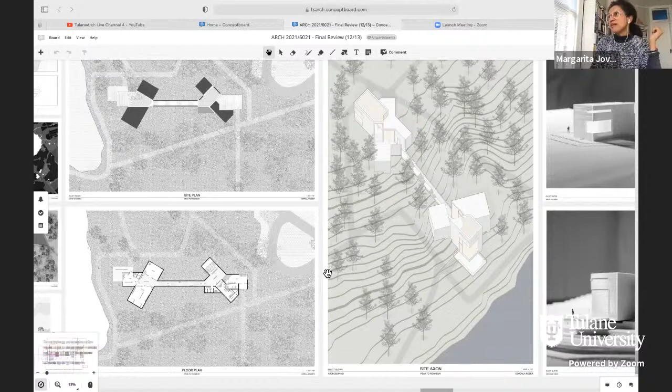In my view, it's a project that has the virtue of clarity, but at the same time sophistication and complexity — meaning you have a top and a down, a clear direction from top to down. But what is really wise is the introduction of these diagonals, these views across. That's really wise as a counterpoint to something otherwise simple, like up, down, and line. So pushing these diagonals further, not only in the organization of volumes in plan, but starting to use these also in sections.

So in plan, for example, in your stairs, in the promenade going down, you might have some porch above, or some breaking down of this wall that allows views to the landscape or something like that — something minimal that can occur here.

But then if we look at the section — in the section of this building through, let me see where it is — yeah, here, the one that has the earth, perhaps, below that one. The other one. Yeah, sorry.

I think there's something that can also be expanded in terms of the way the roofs are done. The roofing — I know those are boxes right now because boxes follow the horizontal strata — but I think at some point you might want to explore the diagonal also in the section, to emphasize either the view to the earth or the view to the sky.

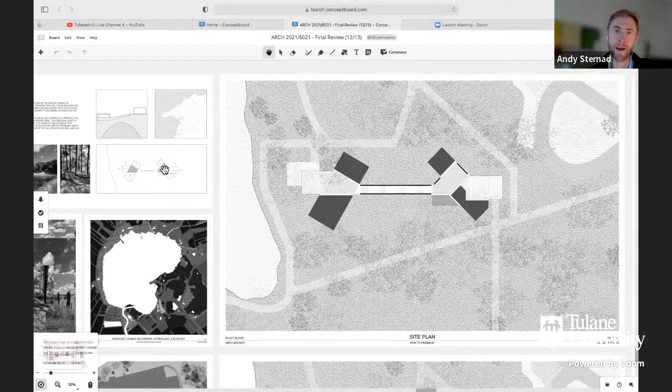Could you describe that a little further? What do you mean by that? Well, I don't understand looking at the project where the angles are coming from. I like them formally, and I agree there's a complexity to it that's working well. But maybe they're referencing something explicitly or implicitly elsewhere in the landscape, even if it's a tree, a grove, a gap, or some feature like the sinkhole that could be explicated through the gallery or through some other content in the space. But it seems like you've now got the pieces in place, and they could do a little bit more if they're connected in some way.

Where do the angles come from, Elliot? Yeah, the angle came from starting with a grid and skewing it a little bit to create that diagonal form, basically. And then, if you look at the more zoomed-out site plan on the bottom left—yeah, that one—they all kind of point towards different areas on the island. The bottom angle points back at the Jefferson Island house and simultaneously at the salt mining industry, while the right one points up the hillside and out onto the peninsula.

And then the two anchors point out onto the lake and start at the hillside. So you're kind of right in that they imply all the different points of interest on the site, but I think you're right that I could make it a little bit more explicit.

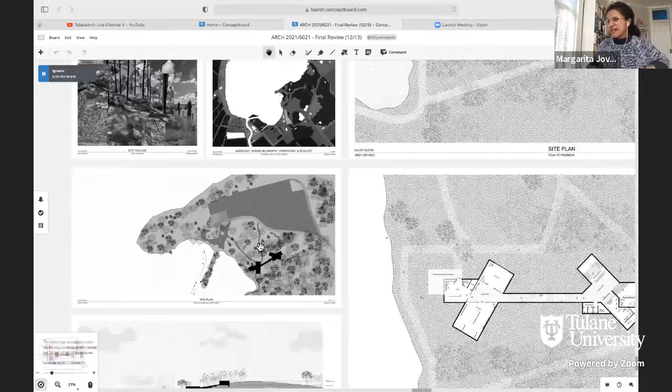Or take—there's this lesson in architecture: when you have an angle, you always want to find precisely where it's coming from, especially in an urban context. This isn't quite that case because it's more landscape, but following that conversation, the idea is this line here might come from a line that exists here, and this line comes from a line that exists here. These kinds of echoes are typical in architectural discussion. You have the first intuition, and then you try to find its cousin on the land—something to back it up.

I think this also has to do with the larger reference system within the landscape that you start to establish. I think this project, like all projects, is part of a larger reference—either what you create for yourself to ground the project, or what starts to give a very specific point of reference. I think this idea of extension within the project, whether platform-based or program-based, could be an interesting way to add not necessarily complexity, but reference within the landscape system.

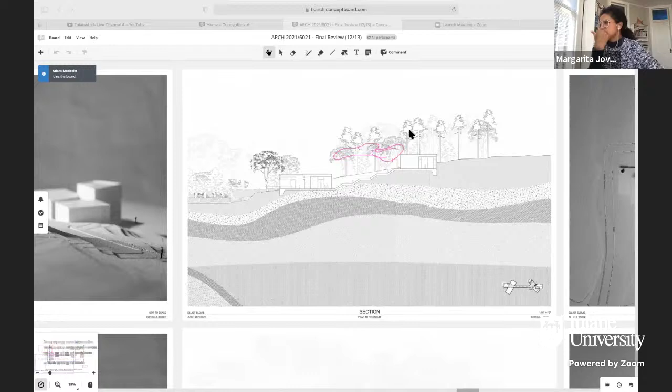Maybe perhaps so, because in the section where you show the stair, I think in the way you go down, there is something about the recognition of these trees on the side that acts as a canopy that you might, it's already there for you. But you're not kind of acknowledging them maybe.

I think the challenge would be to find how few trees you could plant, or how limited your touch could be to still affect the experience. Sure. So not necessarily cutting down or replanting. But how could you intervene with the same kind of finesse that you have sectionally through building and scale in the landscape to accentuate the experience? Okay.

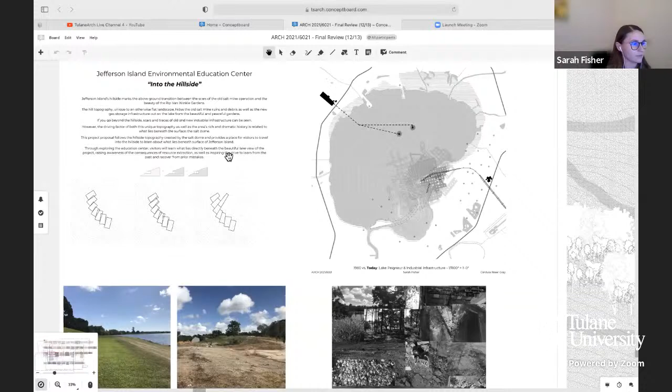However, the driving factor of both this unique topography as well as the area's rich and dramatic history is related to what lies beneath the surface, the salt dome. This project proposal follows the hillside topography created by the salt dome and provides a place for visitors to travel into the hillside to learn about what lies beneath the surface of Jefferson Island.

Through exploring the Education Center, visitors will learn what lies directly beneath the beautiful lake view of the project, raising awareness of the consequences of resource extraction, as well as inspiring the drive to learn from the past and recover from prior mistakes. So the proposal was designed to follow the curvature of the hillside.

It's embedded into the hillside, requiring excavation, which draws attention to the narrative of underground scars. The site analysis on the right shows the location of the scars of the industrial operations, including the sinkhole on the lake floor and the mine excavations below ground. The photos to the left show the shifting conditions from the gardens to the salt mine ruins. The hillside marks the area between these two conditions.

From the site plan, you can further see the positioning of this project facing the lake and sitting between the salt mine ruins to the north and the gardens to the south. It connects to the existing pathways between the areas. The site section shows how the project looks over the water and is inserted into the hillside.

And the model below shows the proposal with both the roof and land cover included to the left and removed to the right, to allow you to see how the structure fits into and cuts into the land. Where the model ends on the bottom is where the lake begins.

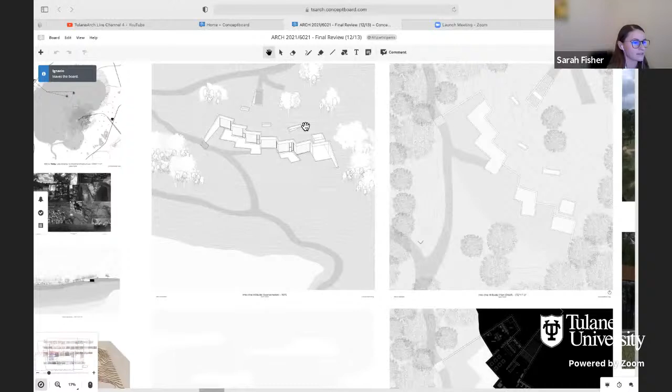And then the axonometric shows the proposal inserted into the hillside and connected to the paths. You can enter from the stairs above or the paths below, allowing movement between the salt mine ruins and the gardens, with this proposal in between.

There's a series of skylights to bring in additional light to certain rooms, as well as an outdoor classroom on the right side of the structure.

This is the roof plan, which further shows the proposal, and below is the floor plan. The entrances bring you into the lobby, where you can go towards the cafe and reading room above, or go towards the gallery and exhibition space below.

To the left, there is a section of the proposal. A bench lines the windowsill on both the inside and outside of the structure. You can walk out onto the roof as well, and the front patios are also embedded into the ground and sit below that ground level. Then the perspectives to the right further show the structure and how it sits within the landscape.

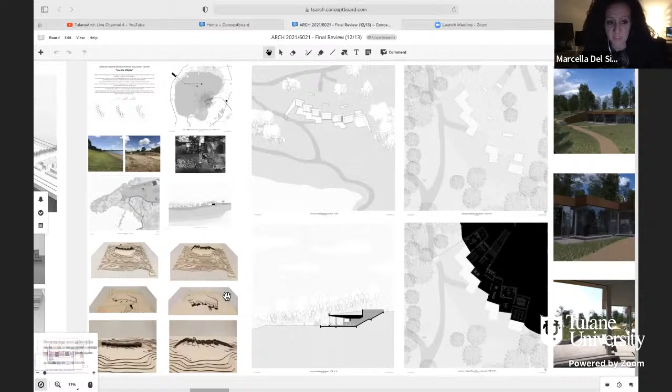I'll start. I think this project, as the previous one, is quite clear in the sense that we're really able to read the parti, and I think there is a clear connection between the premise, the parti, and the way in which the project is developed right now.

To me, there are again multiple moments of interest that start to organize the program and the relationship with the landscape. That has to do with the duality between the continuity and the fragmentation of the moments that you start to establish. So if you go to the plan...

Each of the... there are moments where you start to register this individual program and the procession of this individual program opening up to the landscape. But at the same time, there is a continuous spine, so the semicircle that you start to establish, that is able to provide not only the connection, but also the circulation partially between each part of the program.

And then I think when you go to the outside, there is another moment for the collective to come together, as an extended space on the outside.

So in a way, if you look at the plan, almost it works as this—just looking at this plan specifically, at these parallel zones that work with an intersection between the continuity of the arc with the specific... let me see if I can annotate here, maybe it's better, this continuity here that is provided, I think, on multiple levels to the directionality of the fragmentation of the program that you start to establish and how these start to look into the landscape.

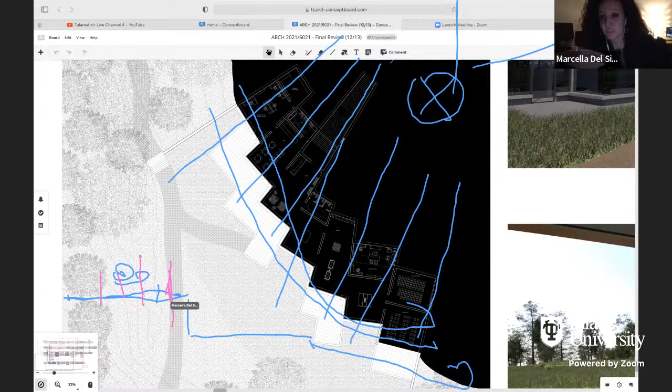Not because necessarily the program needs to extrude to the surface above, but perhaps working more with devices like points or retaining walls that start to really mark the location of the indoor program onto the exterior landscape. So I think that could be, because right now this is what's happening in the project, right?

So it's really this line versus this line versus this, and then all the program is here. But I think there is an opportunity here to push maybe some of these critical moments of transition in your project onto the landscape, onto the above surface, this moment here.

I'm saying this because I think maybe a second level, in which some of these moments can even start to be a little bit more either poché or maybe inhabitable in your project—right now they're just transitions, you know, from one moment to the other.

But maybe these interstitial spaces could potentially start to have other meanings, spatially or experientially. I'm talking about this space in between. I know these are walls right now, from program to program, but I think there is a lot to do with this. Let me delete again and redo it.

So I think there is a lot to do with this, both on this level of the floor plan that we see, but also at this level of how these perhaps start to be registered onto the higher level of the landscape. So I think in your case, similar to Elliot, to the previous one, there is a clarity on your project. And I think the question is what else can be added to start to bring together the spatial quality and the experiential quality, pushing some of these aspects a bit more into the parti that you currently have.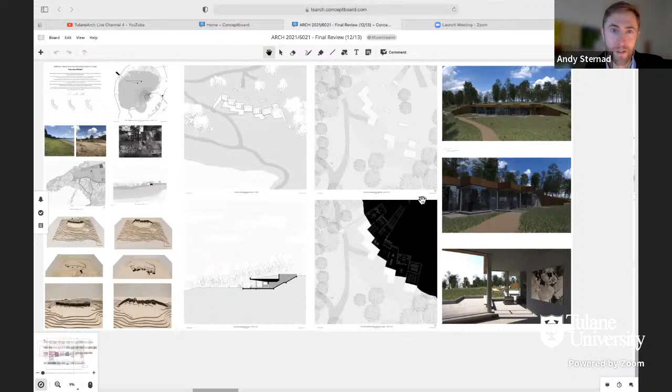Yeah, so the invisibility was intentional, and the reasoning behind that was, this project involves a huge amount of excavation and is a fairly big undertaking and mark on the landscape, but it doesn't look like that when it's finished. It looks more invisible, and I felt that really spoke to what I was trying to draw attention to, like in the education center, with having this huge sinkhole and this giant disaster here. And when you look out, it's just this pretty lake. People are getting buried near it.

Like it looks so beautiful, but there's so much going on underneath that you can just kind of cover up. Whereas if you went into the water, there's all these buildings underneath that are sunk, and ships. So it's really drawing attention to the history of the area, making you think about, well, it might look all pretty and clean now, but there's a lot of damage that lies beneath the surface. So I wanted to bring attention to that beneath the surface condition and then how it looks from above.

Including the salt mine, one should say as well. Yeah. I think that's all quite successful. I'm just wondering if this is actually the best site for that, to execute that idea, or if it needs to engage the mine shaft somehow, or the pier, or somewhere else on the site, perhaps.

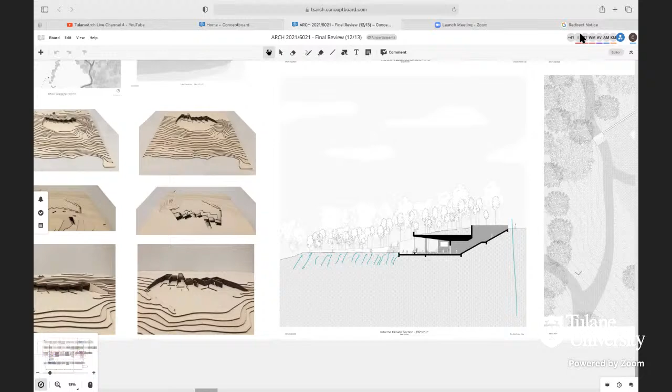So I wonder if you could go and be more radical in the sense of maybe extending the topography in the plan, and then the trees going down and making it more part of this kind of side forest in the place.

As opposed to this big platform after the excavation of the quarry, let's say, that you have here. And maybe then also be a little bit stronger in the entrance, and as Marcela was saying, a little bit stronger in the capture of light, even just for the water in the storm not to get inside your light wells.

And maybe your arrival to the path is an entire built carpet that goes there, and maybe the entrance is a piece of the stair that turns and starts one place, turns to another, and finds its way inside the slope, a little bit like Álvaro Siza in the restaurant of Leça da Palmeira.

Like somehow extending your muscles, no? And you're being so polite, no? So just like extracting more things of what your strategy is.

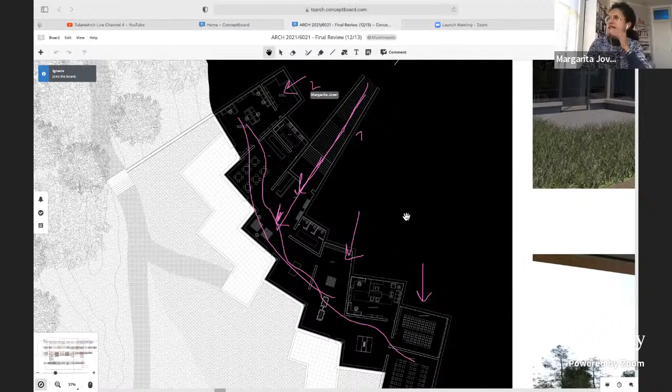And that would mean the series of light wells, instead of being inside the building, would actually be at the retaining wall. That they provide light to the, so in yellow, well, I cannot change the color anyway.

So that moment of the light well, if the light well is behind the retaining wall, it can provide light, but it can also provide an alternative path from 1 to 3 to 2, a circulation at the back that allows you to choose where you enter, 1 to 2, 1 to 3, or 1 to 4. That way the entrance is more diverse, and you can meander from north to south at the back of the building.

Yeah, those are great comments. It's funny because it's not the first time that they're coming up. Sarah, we had the back spine with an alternative path to entering the building discussed before, right?

And then also Sarah actually already reduced the excavation, the flat area in the front, quite significantly. It's still very legible, but it was bigger than it is now. So you're making steps in the right direction, but these comments were already made at midterm. So it's interesting that it's being brought up again.

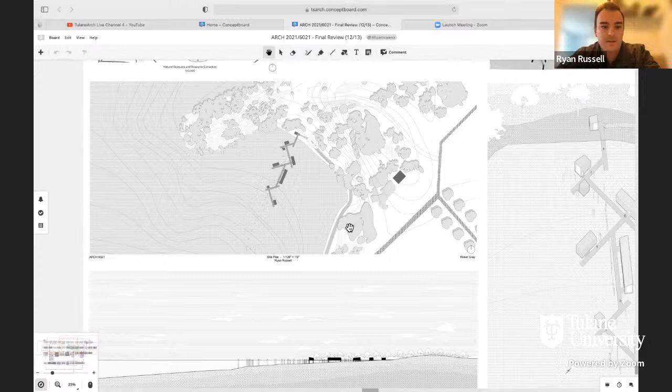Below, we look at the site plan and the proposal's relationship to the rest of Jefferson Island. The proposal resides in the small bay and takes place almost completely on the lake surface, or on the water. The Joseph Jefferson home can also be seen there in the middle right, along with the allée of trees, which is the entrance to the Rip Van Winkle Gardens Botanical Gardens.

The pathway along the bank of the lake is also a direct path to the proposal. Currently this path exists as an alternate way around the site with no clear destination, and it just kind of abruptly ends currently.

In the section, at a more abstract way, we can see how the piers and the buildings relate to the surface of the water, as well as to the elevation change to the earth below due to the change in topography from the sinkhole.

Looking at the photos of the model, we take a look into the relationship between the proposed structure and the existing piers, and we can see how that relationship is formed. The boardwalk weaves in and out of these piers as a way to engage the visitor to the site and offer different perspectives of the site's history.

That concept is furthered in the axonometric, where a closer look at the roofscapes starts to emerge, and how they also relate to the boardwalk and those existing piers as well. Windows in these structures are formed in strategic places to allow the visitor even more perspectives of the lake, the island, and the peninsula that are currently unavailable unless you are on a boat or in a kayak or something like that.

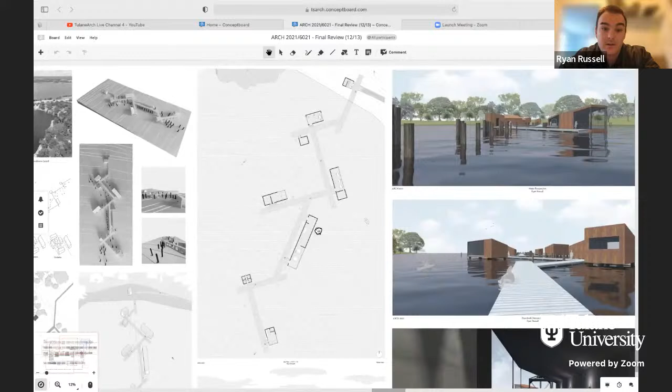The visitor first arrives at the lobby, where they can get any information, kind of like a beginning stage for the proposal. This building is the only one solely on the land, as it acts as the main threshold for the proposal. So you enter on the land and then eventually venture out onto the water.

Continuing onto the water, the first on the right are some of the private buildings like office spaces, and further down is the reading room and library. In this view, you can start to see views sticking out, like back to the Jefferson House or out onto the lake. Finally, reaching the very end is the cafe, which offers an unobstructed view of the rest of the lake back towards the botanical gardens and out towards the rest of the piers.

Looking at the section, you can also start to see where these buildings and their relationship to the proximity of the water surface becomes a little more visible. The depth of the existing and proposed piers is also shown, giving a bit more insight as to how those piers are still existing today, even after the disaster.

Finally, in some rendered perspectives, we can start to see some of these views, looking at opportunities that may not exist currently. One being from a boat looking back towards the proposal - that's the one on top - and that's of the cafe space, looking back towards the island.

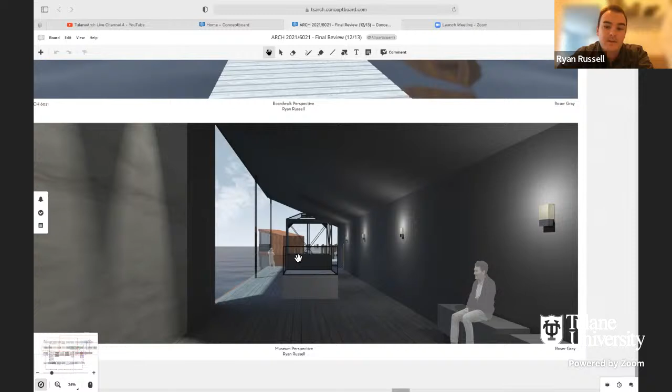Below is one looking towards the lake, out onto the lake through the project along this axis line. And finally, one interior that offers that aforementioned museum space with views that start to look out, and opportunities from dark to light. This is just an experience of what a visitor could have as they learn about Jefferson Island, as well as explore what historical extraction has to offer.

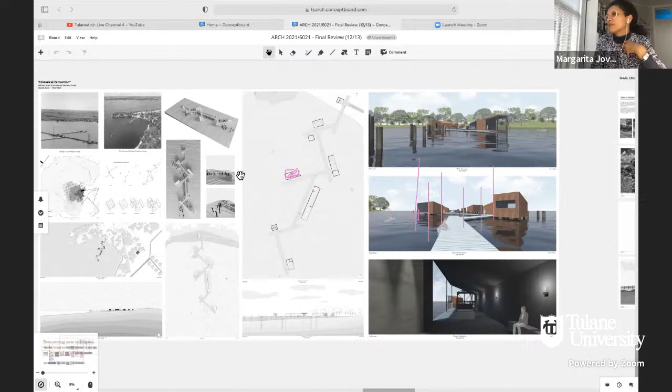It can even perhaps detach from it and have two different positions. You might say that if you organize an exhibit that is a different one, you might move this piece here in the plan, move this one here, and make another expo that is touching this and then entering this way and this way. So you might arrange your boxes in two or three different positions to make different seasons of the exposition.

And then another thing you can do also is to engage the water, and when you move these pieces, suddenly this water in between the boxes might be aquaculture or whatever, or it may be something related to the water that is also related to the program. So engaging infrastructure, but also landscape and time in the way the building operates makes it almost an infrastructure, which I think is really interesting.

I think it's really, really pretty, really exciting proposal.

Thank you. Yeah, Ryan, I have the same question while you were presenting about the changing of the site over time. And I think this is, again, the first project that we see that is on water. But also what I appreciate is that you really started from acknowledging the traces that remain from the extraction process of resources. So this was really your starting point, and actually it's interesting because I didn't see this until now, that are there and are currently there.

So I think that's a quite interesting starting point to begin to build on what's there, but at the same time, again, work with a different type of landscape, which is the dynamic landscape of water. I agree with the comments. So this, I think, requires new sets of tools somehow to build and to see how this project might exist now and maybe in the future.

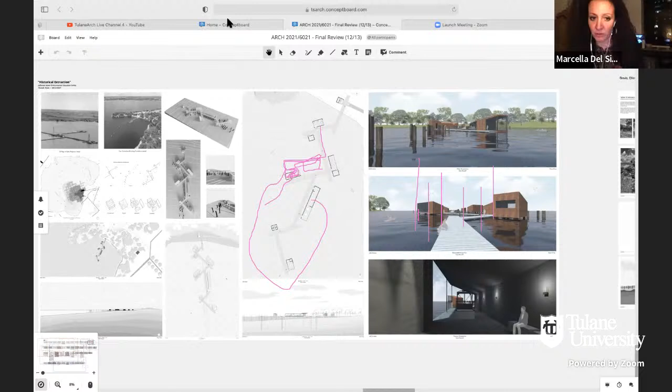I'll follow up on some of these comments. Thanks again for having me - I really enjoyed seeing the projects and also seeing the range of approaches, so each project was quite different, but also I think there was a thread in all of them - very different, but also similar in a way because of the clarity of the process you all went through. I really appreciated seeing different ways in which the projects touch on different parts of the landscape, different parts within the site. Overall, I think there was quite strong consistency in terms of representation, especially the two-dimensional plans and diagrams - I think that was quite consistent. One thing I was missing a little bit in some of the projects was the more experiential understanding of the projects themselves and some key moments within each project - not because renderings need to look photorealistic, but really the understanding, on some level, of the human perspective of your projects. In some cases it was clear, but other projects needed that in order to validate the initial narrative.

So that might be something that is a post-production component that you guys add at the end, but I think some projects would have really benefited from that ground-level perspective - understanding the experience of moving through the site, etc. And I agree with Andy's comment about engagement, which connects to the comment about experience - how some of these buildings, given as a program that is pretty precise in terms of square footage, etc.

But at the same time, I think the landscape here plays a very important role. Some projects did engage the landscape, some almost did not engage at all, where the project could have been almost anywhere. I think the potential of really working as a dialogue within the landscape, within the site, is something that in our project could have been much more embedded.